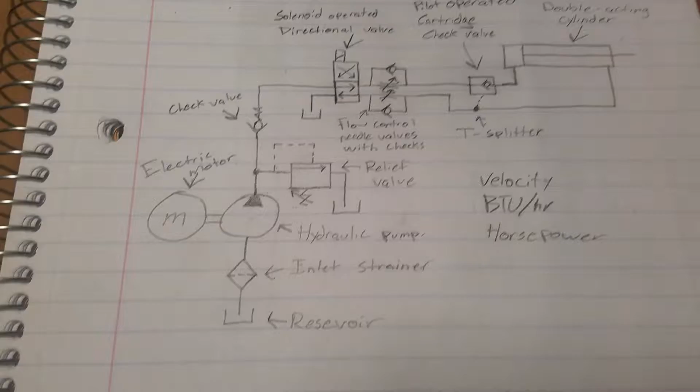Alright, we're gonna show you how a hydraulic circuit works. What we're using this application for is roughly a 20-foot wind turbine, lifting it from a horizontal position to a vertical position.

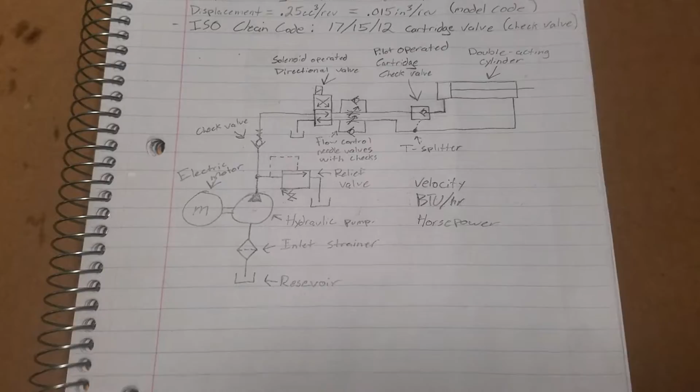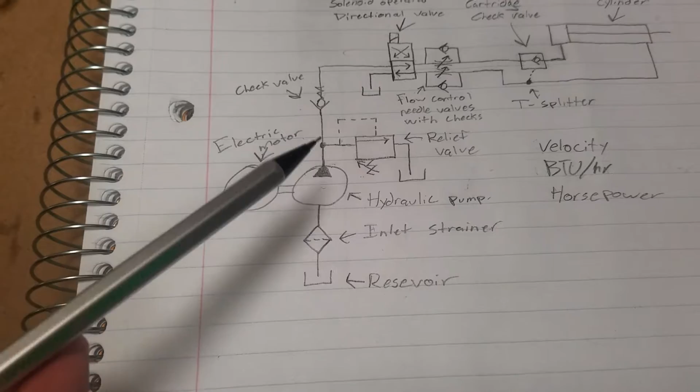Our reservoir is holding all of our hydraulic fluid, and it's going to pass through our inlet strainer by our pump that is being driven by our motor. Our motor is going to drive the hydraulic pump and pass it through our relief valve that is set to a specific PSI, and it will constrain it to that PSI until we change it again. Once it passes through the relief valve, it will go through our check valve that is only going in one direction, and after that it will go to our directional valve.

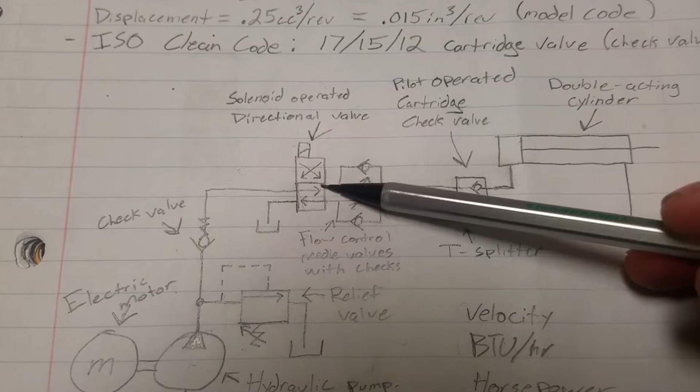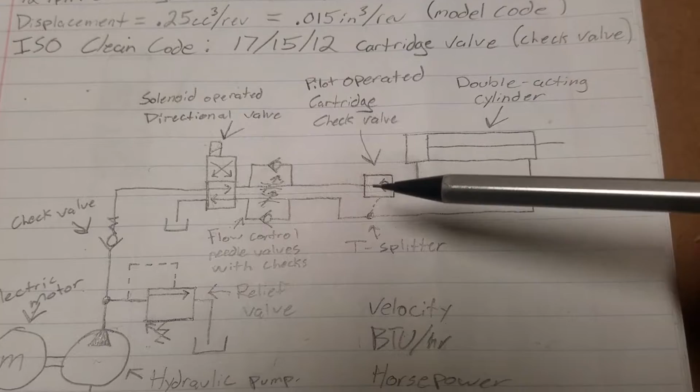And after that, when it goes through the directional valve, it's going to the pressure, which would be this one right here, is going to go through this needle valve, and it also has a check in it, so it's allowing free flow one way and then metered on the way back. After that, it's going through this pilot operated cartridge check valve, and it's going to go into the end of the cylinder, which is going to extend the rod, allowing the wind turbine to lift up.

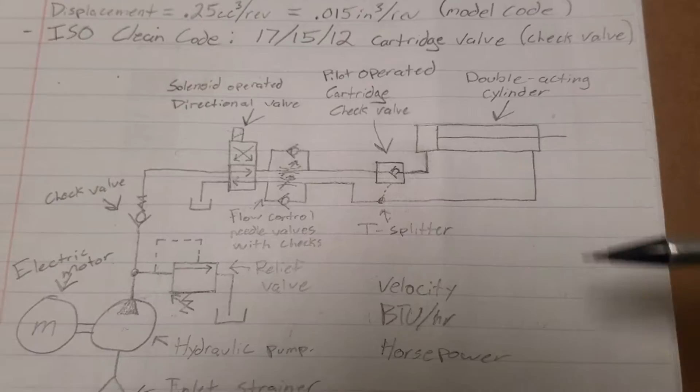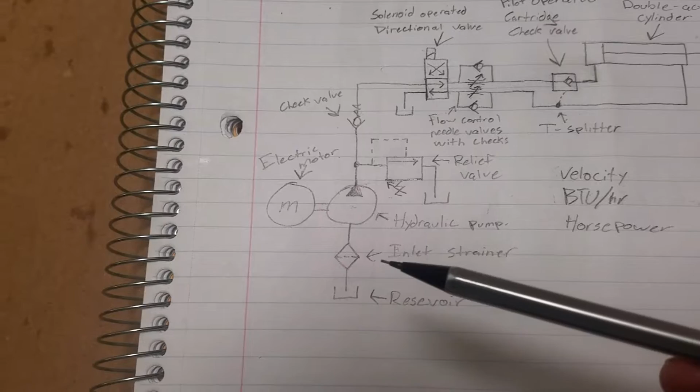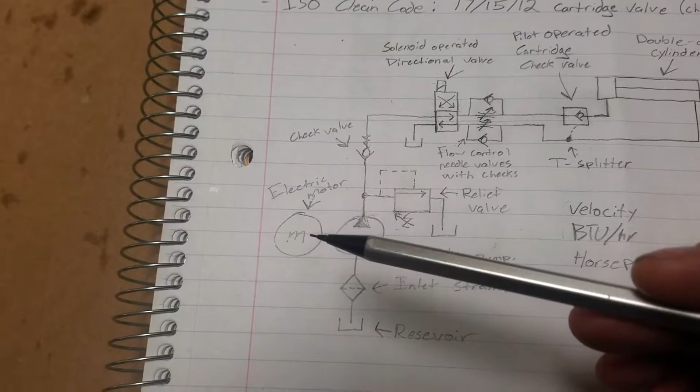Now, your reservoir holds all your fluid, and it also acts as a fluid conditioner, cools it down, and all the contaminants will settle at the bottom and whatnot. Your inlet strainer is more commonly going to be a coarse kind of strainer. It's not going to filter anything that's very small in micrometer. After that, it's going to go into the hydraulic pump, and its purpose is to create flow. That is being spun by the electric motor, which is a 12-volt DC motor, spinning the shaft of the pump, which is allowing it to create flow.

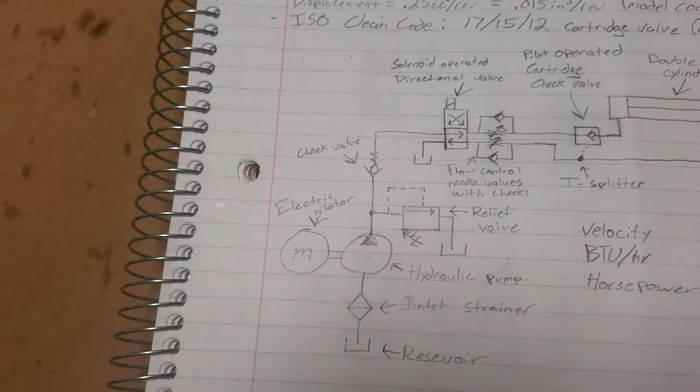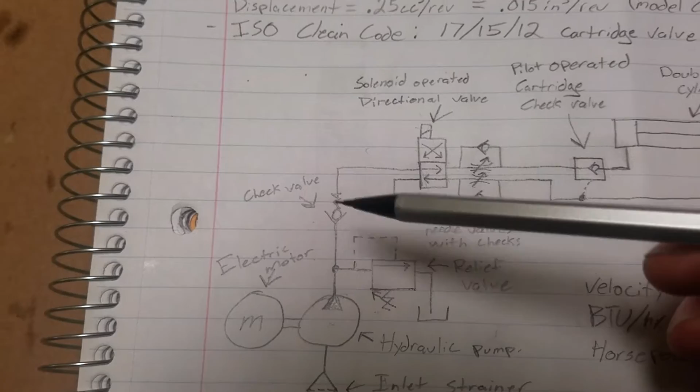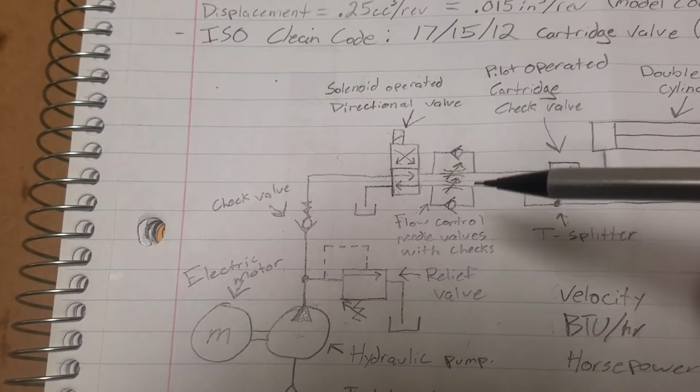Then the relief valve, it gets set to a certain PSI, your maximum working PSI that you'd want to perform in the circuit. Our relief valve also has a return to the tank as well, so that the extra fluid that is being passed, that's not being used to pass through the check valve, will go to the tank. And this check valve is just a device that allows fluid to go one way and not the other, kind of like a diode in an electronic circuit.

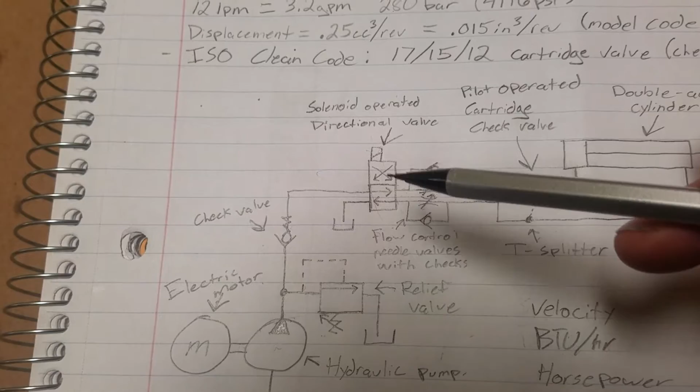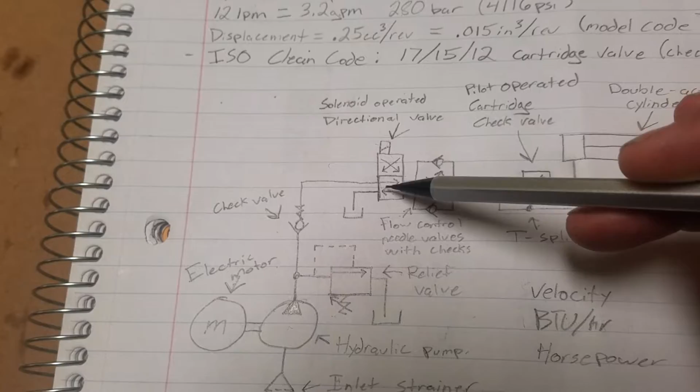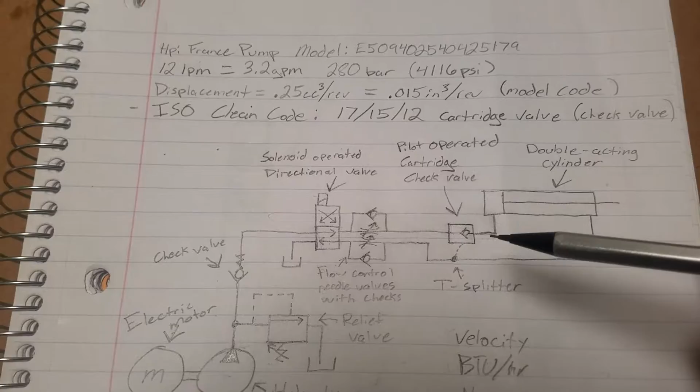This solenoid operated directional valve is going to allow direction in both ways in this little circuit here, and how that operates is when it gets the electronic signal, it will shift, and then this envelope right here will now become down here, and that will allow the pressure to actually go this way from here to here, and pressurize it this way to retract the cylinder, and all of your return fluid will pass through this way and back through down here to tank, back to the reservoir.

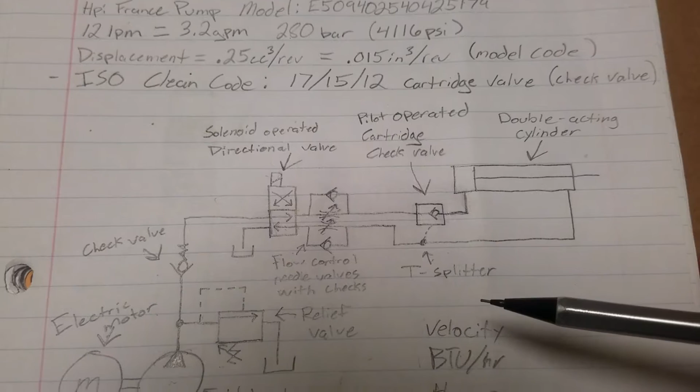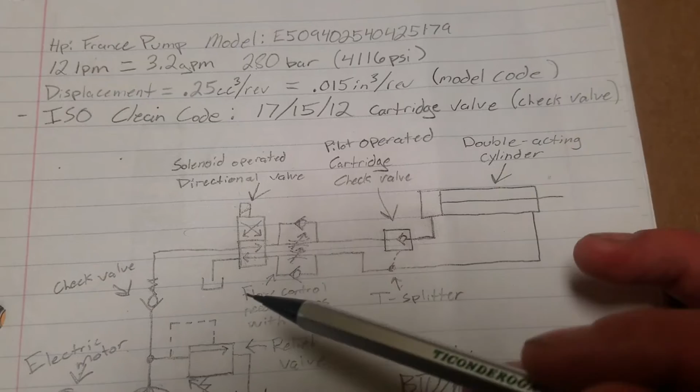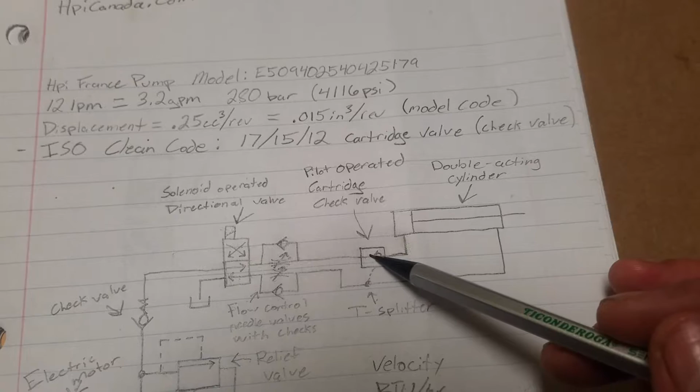Mind you that our pilot operated cartridge is also a safety mechanism, so that when the cylinder is completely extended, it will not retract due to a load being put on it. And how that operates is on the pressure side, from this directional valve here, if this is the pressure side, it's going to free flow through this check right here, go through, it's going to pass this check, free flow through that, and then extend the cylinder.

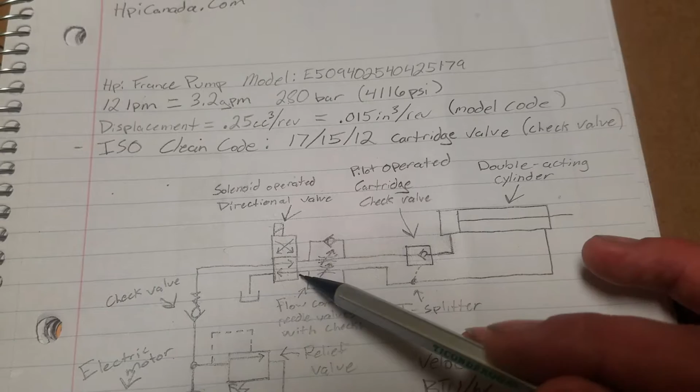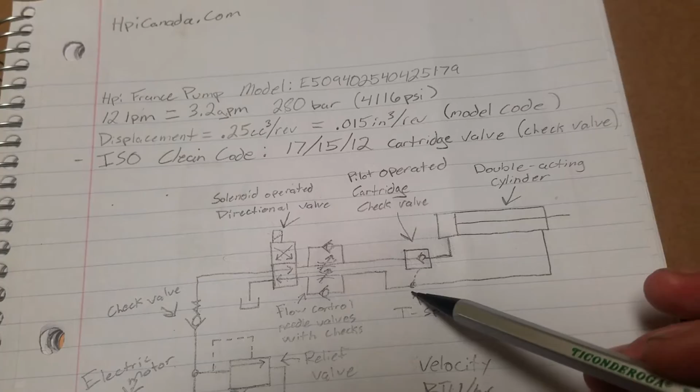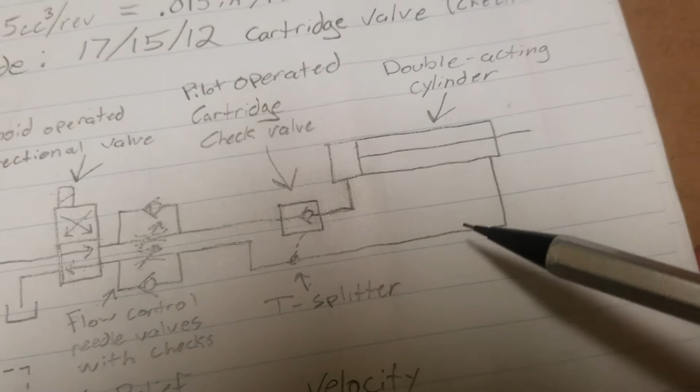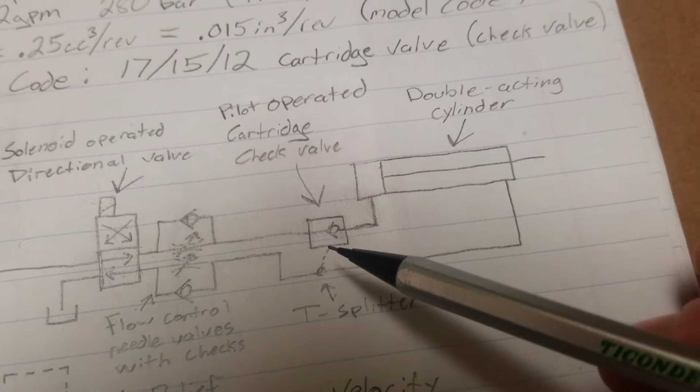Now on the return, when this directional valve switches and the pressure is going to be the opposite side, how this works is it's going to do the same thing here through this needle valve, go through. Now this right here, these little dash marks right here, those are pilot operated, meaning the fluid's going to go this way, and it's going to try and retract the cylinder, but it's going to build more pressure that it will actually deliver a pilot signal to this check valve to release it, because it can only open one direction.

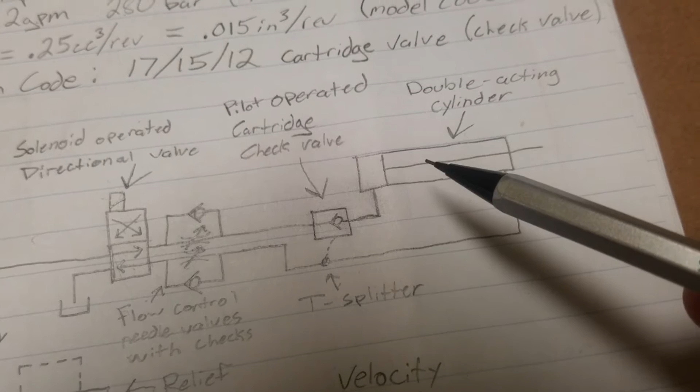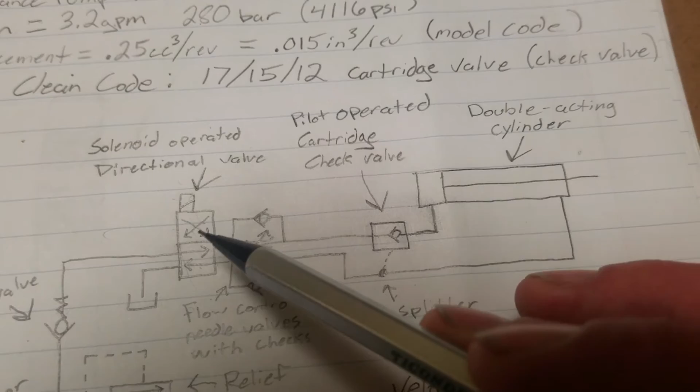So by pressure working on here, the excessive pressure is going to go through here, extend the ball out, and allow fluid to travel back, taking this path here, going back down to the reservoir. And that's basically the whole complete circuit and how it works.